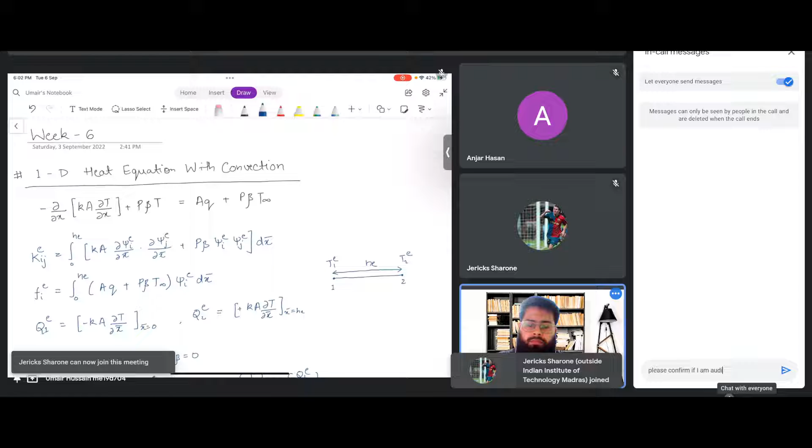May I know your feedback for the course so far? Hello, yeah, am I audible? Yeah, hello, good evening. So can you guys confirm if I'm audible?

Okay thanks, so yeah, it's already 6 weeks have passed for this course. I would like to hear your feedback if anyone wants to share how the course is going for them so far, and then maybe we'll start.

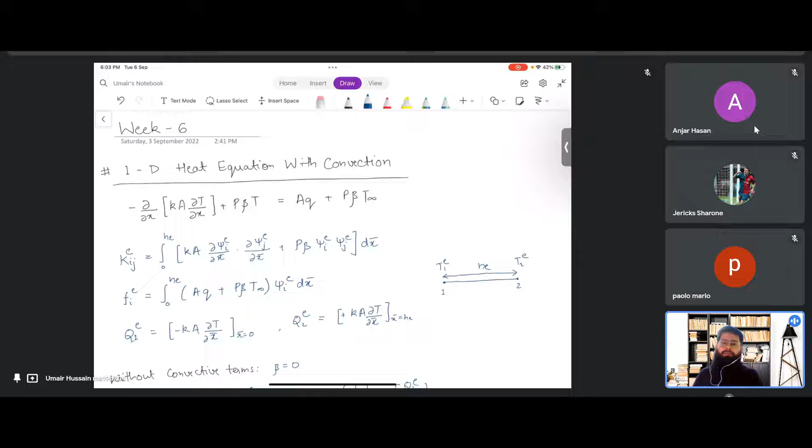We haven't done any introduction for the participants of this course so far. Is it possible for anyone to unmute themselves and give a quick introduction on why they are taking this course? So yeah, anyone would like to introduce themselves and give some feedback on the course so far? Already 6 weeks have passed. Would anyone like to volunteer?

Yeah, hello. So Mr. Paolo, how is your experience so far for this course? Yeah, it's really basic, yeah.

Mhm, yes. Even I have been following this course. So after a long time revisiting FEM, there are a lot of basics. Yeah, exactly, so it's basically focused on FEM. Although the course is under the mechanical faculty, so there's some kind of bias for solid problems and thermal problems, but yes, it's quite basic. I have also been following this course, it's been a long time since I have had touch with FEM. So yeah, there are a couple of basic things that even I had forgotten or not gone through. It's a learning experience for me as well for the basics, but for solving more realistic FEM problems, there's a long way to go from here.

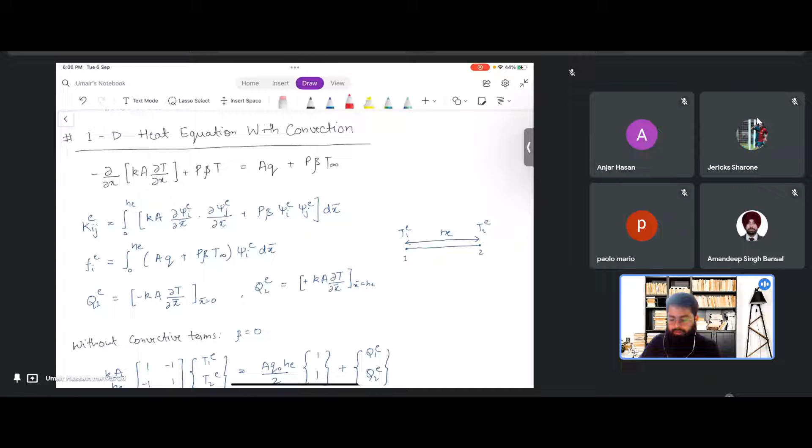Until last week, we had just started off with the introduction to heat conduction problems, heat conduction with convection. This course is basically focused on 1D, so we consider the 1D heat equation with convection. We know the governing equation for the 1D heat equation with convection, and then we can get the weak form as we have been doing so far. We get the stiffness matrix term, the force vector terms, and the boundary terms as well. Ignoring the convective term, to remove the convective term we just need to remove the beta term, giving the simple conduction problem.

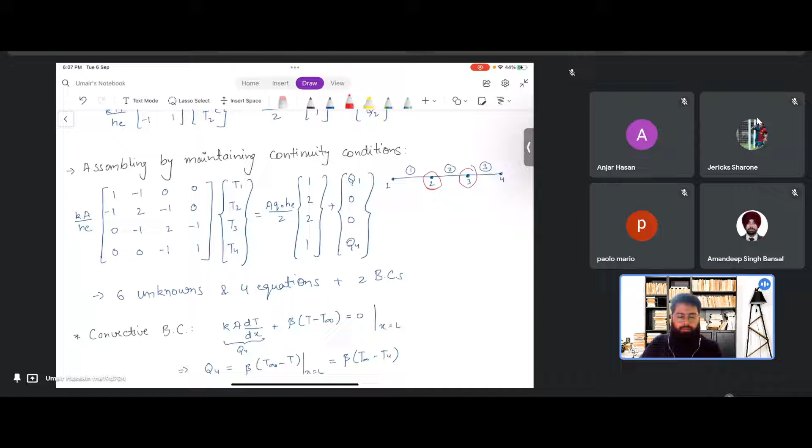The assembly is just as usual, what we have been doing so far. Whatever the common node is for two elements, we follow the continuity condition for the primary variable and add the force terms at the common node. For extra unknowns, we use the boundary conditions, and that's the way we solve any basic FEM problem.

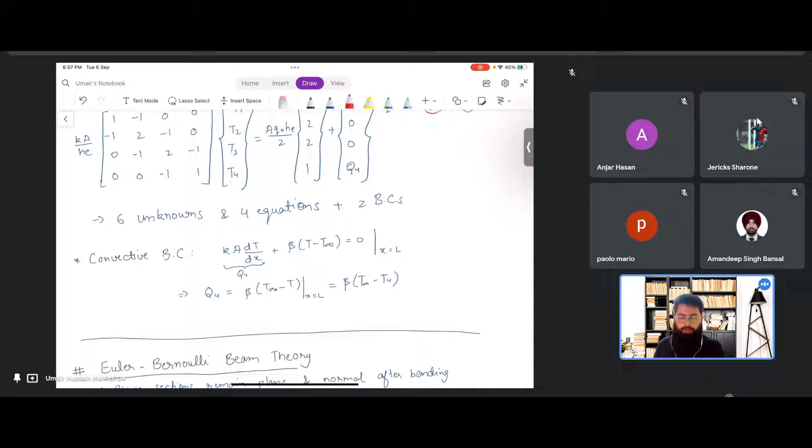So we just visited the basic 1D heat conduction problem, and then we started with the Euler-Bernoulli beam theory. As you might have studied in solid mechanics, there are some basic assumptions for Euler-Bernoulli beam theory. The very fundamental one is that plane sections remain plane and normal after bending. This kind of assumption is more suitable for long beams having considerably less thickness, and also where the deformed angles are small.

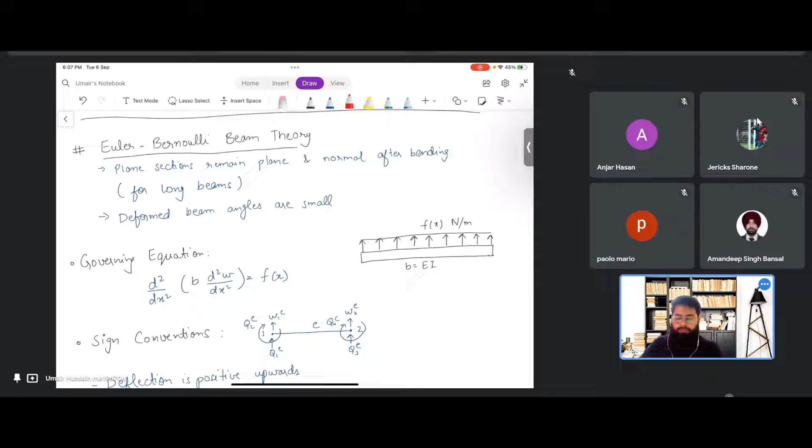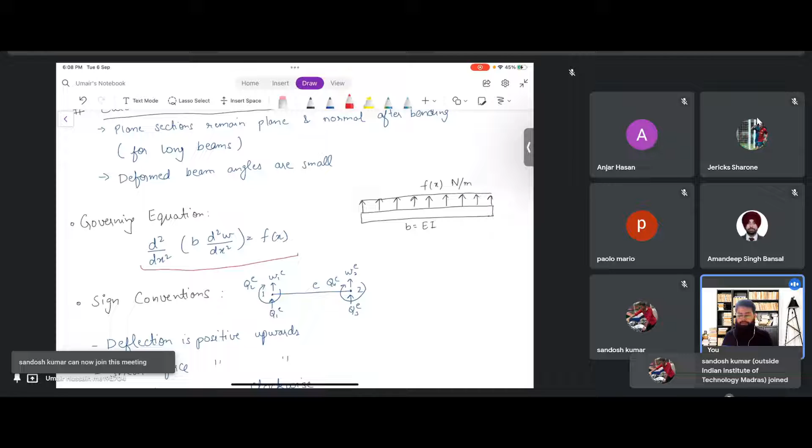For Euler-Bernoulli beam theory, we get the governing equation for deformation like this. We'll be following certain sign conventions for these problems: as usual, the upward direction is taken as positive for deflection and shear force, and for moment and slope, clockwise is taken as positive. So this is the general sign convention we'll be following.

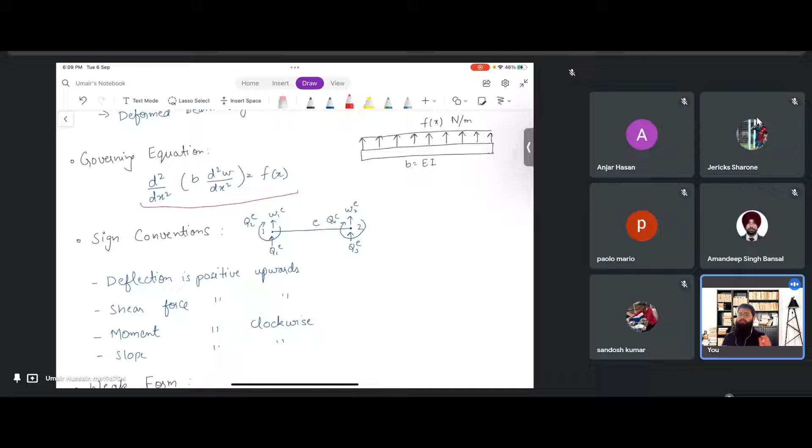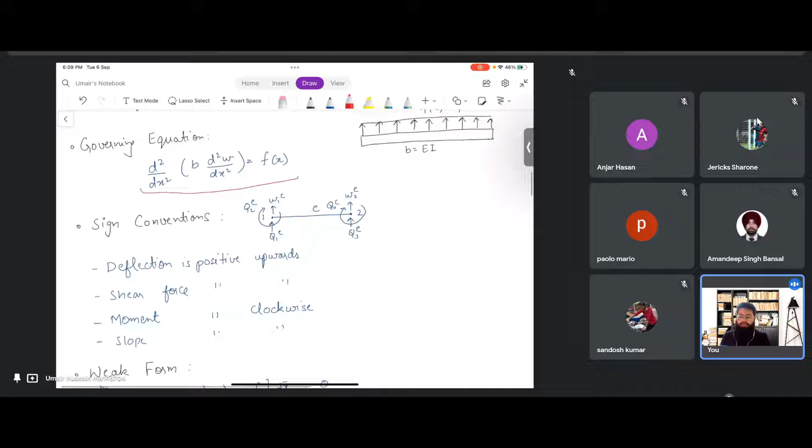Now this type of equation is a fourth order equation, so that's the unusual thing about this problem, that's why we are studying it separately. The heat conduction and axial deformation bar problem were totally identical - same equation, same type of boundary condition, everything was the same. But in beam problems, the equation is now a fourth order equation, so we have considerable differences here.

Now the integration by parts is done two times, and we get two separate terms for this boundary term, so our degrees of freedom per node increases. Since we have two primary variables now, one is W, that is deflection, and the other is the slope, which is the derivative of W.

For secondary variables, there was something we studied in earlier classes to identify the primary and secondary variable using the boundary term. So if we substitute in the boundary term, we have the weight function and the coefficient of the weight function. If we substitute the primary variable with the weight function, whatever we get is the primary variable, meaning the one we are solving in the equation. If we substitute it here, whatever we get is the primary variable, and whatever coefficient is left, that is the corresponding secondary variable. So here also, if we substitute W, we'll get W dash, which is another primary variable, and the corresponding coefficient is the secondary variable.

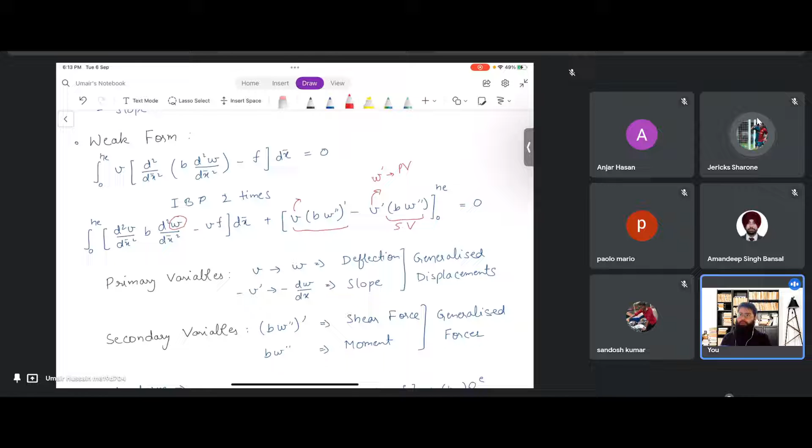I hope there's no other question. Should I move ahead? Yeah, yeah, okay. Thanks, thank you. Yeah, no problem.

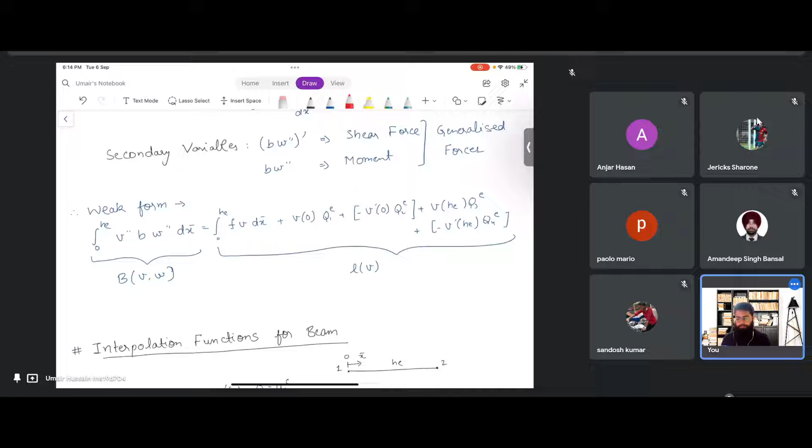So now in the beam problem we have two primary variables and two secondary variables. The interpolation is going to be more complicated and a little different. We get the weak form, the bilinear term, linear term, everything, and the next thing is to find out the interpolation functions.

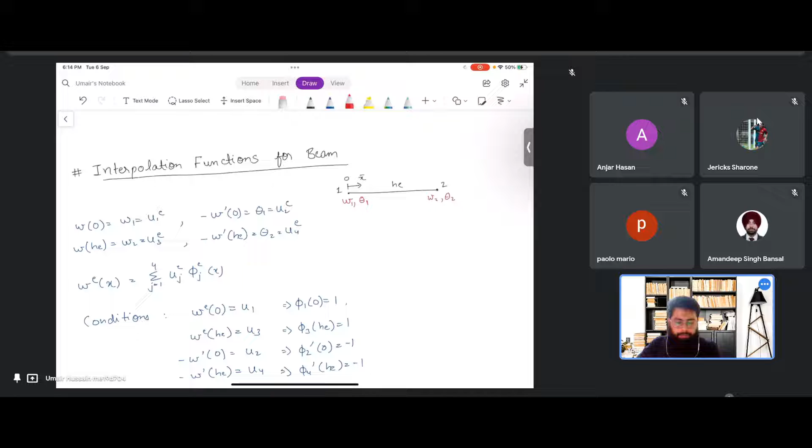So there are two things. On the first node we have the deflection W, and we also have the slope theta. On another node we have deflection and slope. Our interpolation should be such that we get the required values for W. Our W element should be such that at the respective node we get the required value of W, whatever it is, plus we should get the required slope of W.

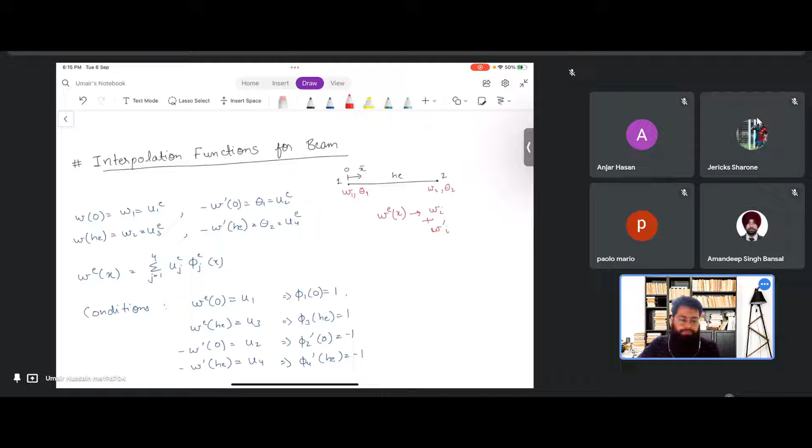So basically what we do is take a common variable, U1, U2, U3, U4, and when we put these conditions, at the first node this should be U1, and on the first node this should be the deflection, this should be slope, at the second node this should be deflection, this should be slope. So we'll get a couple of conditions.

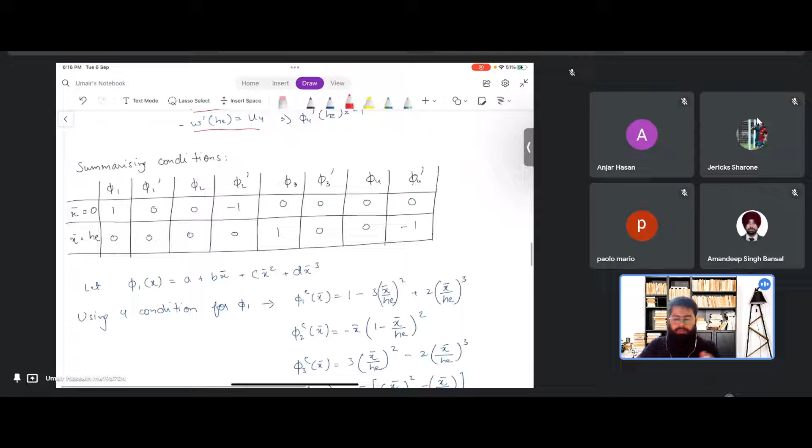There's a lot of equation involved here, but we can just go through it. For each phi, we have four conditions: two conditions on the value of phi, and two on its derivative. So with four conditions, we can get a third degree polynomial.

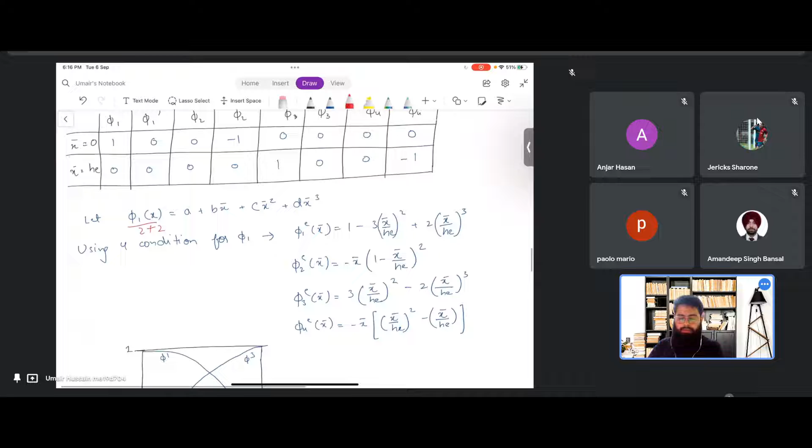Since we have four equations, we can get the value of four variables, so we can get a 3-degree polynomial. Solving all this, we get complicated polynomials, and we can even plot them to see that we'll get the required value of slope and the value at the corresponding node.

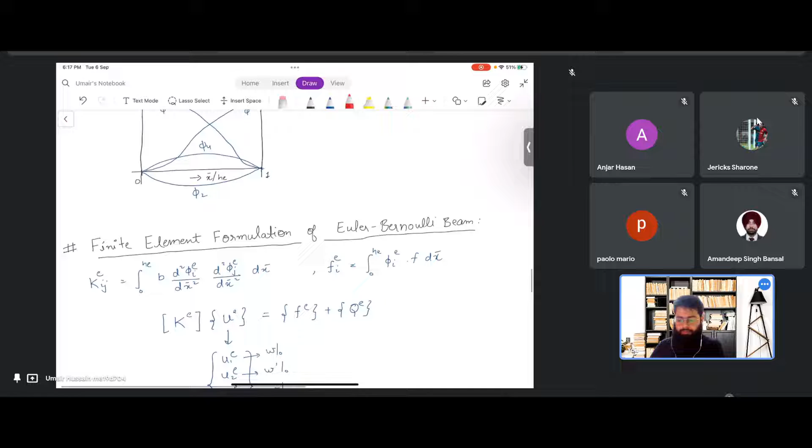Okay, so doing the finite element formulation for the Euler-Bernoulli beam, we have the stiffness matrix term and the force vector term.

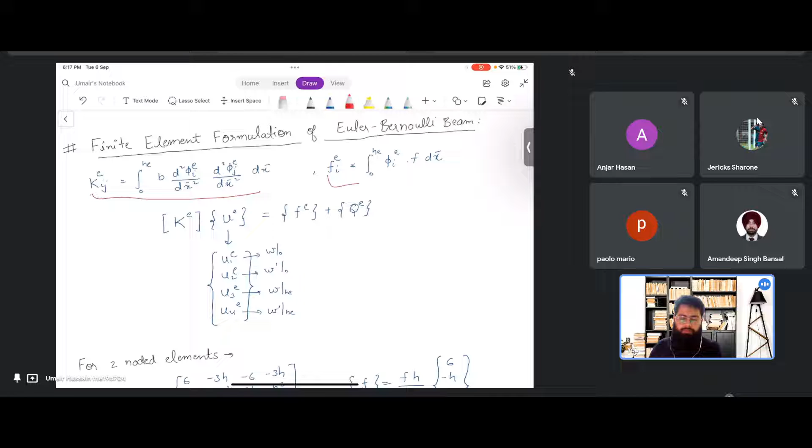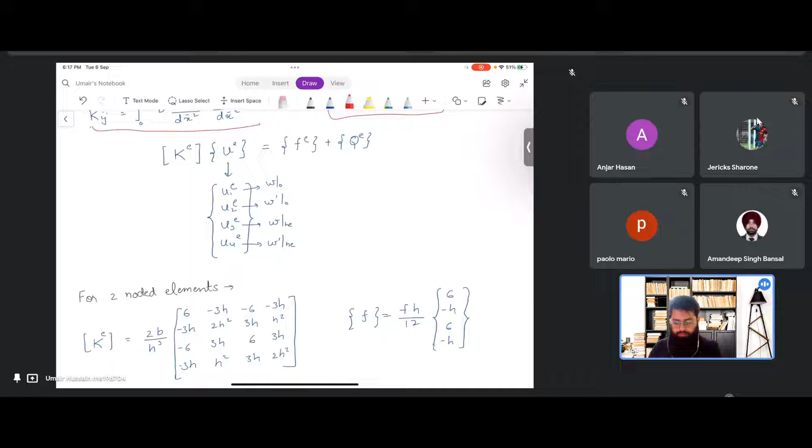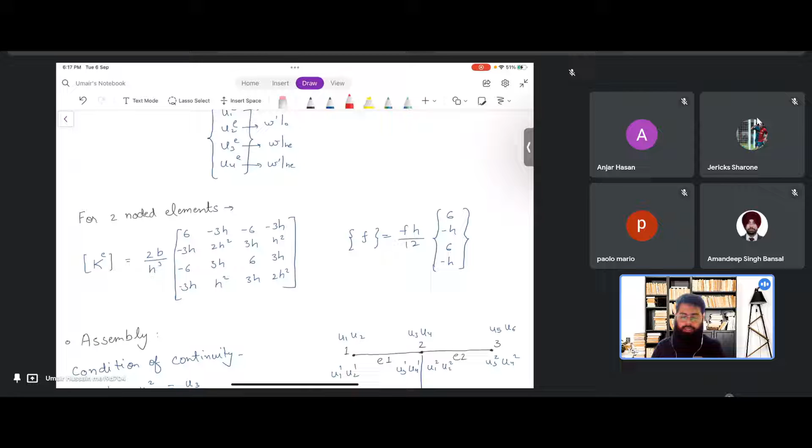Now it's pretty much the same, but we need to watch out for the continuity condition. The process of solving this and getting this is rather difficult. Maybe I'll try to show you in class at the end how we got all this, but it will take time.

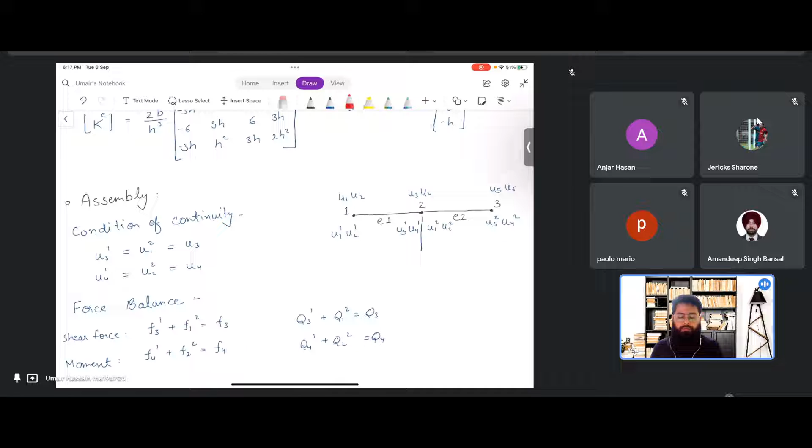So the main thing is the assembly part of this, for two nodes being shared. For a node being shared by two elements, we'll have a common displacement term and common slope term.

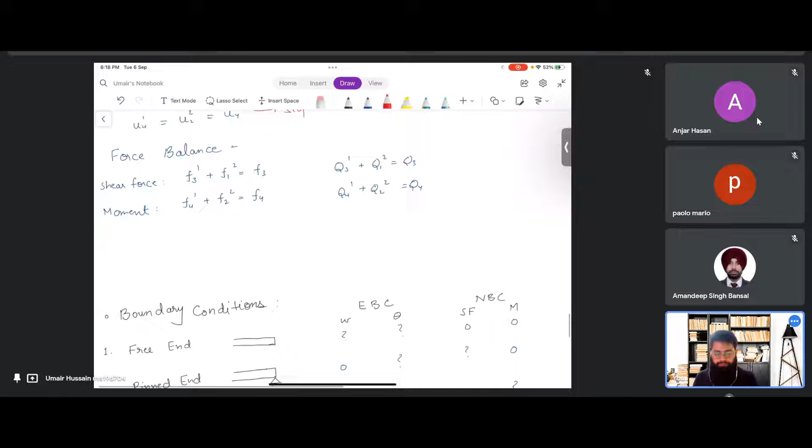This is the displacement, this is the slope, and likewise for shear force and moment term. That's how we assemble this. I'll show you a bit of it later; first we'll just go through it briefly.

One thing also unique about these problems is getting the boundary conditions. For a second order equation we need two boundary conditions, and for a fourth order equation we need four. Earlier we had one primary variable and one secondary variable, one for each. Now we have two primary variables and two secondary variables, one for each, making four boundary conditions.

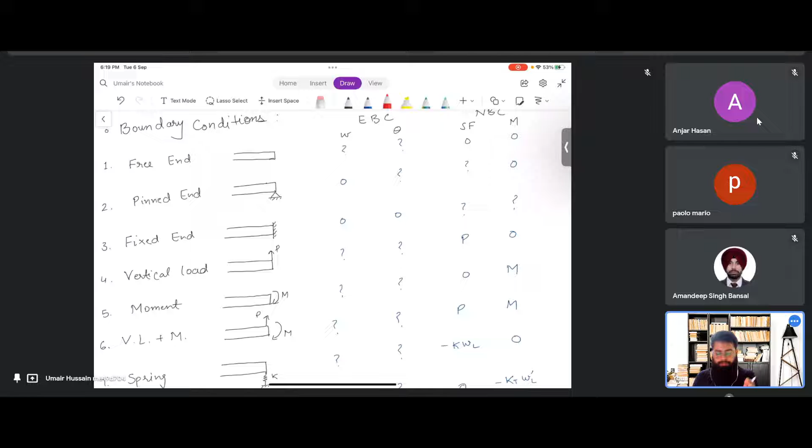So these are summarized here. I think you might have gone through this in class already, so I need not elaborate; this is very trivial. If there's any doubt, please let me know. I think we are pretty much done here, and then we'll start the questions.

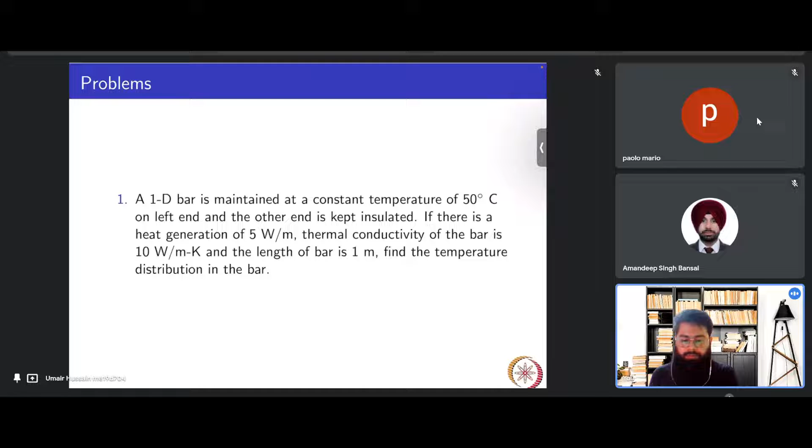So I think if there's no doubt, we'll start with this problem. As usual, I request your participation. So we have a 1D bar here.

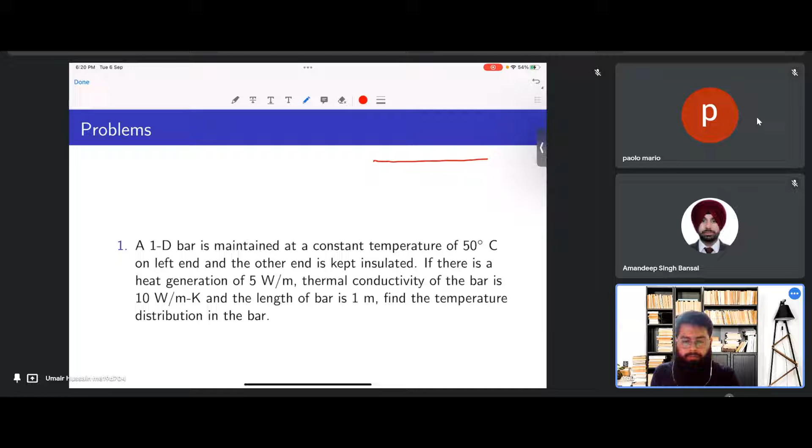Temperature at this point is 50 degrees, and the other end is insulated. So can you tell me the boundary conditions? I've written it for the first node, so can anyone tell me what should be the boundary condition for the other end of the bar?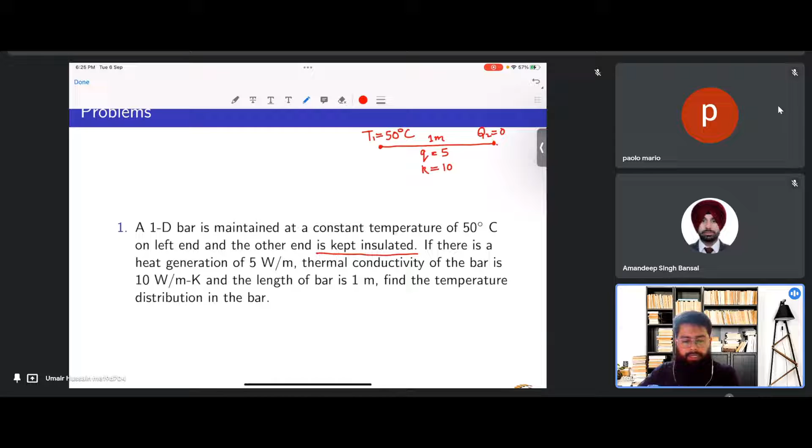So this is a general 1D heat conduction problem. We'll keep it simple and consider one element, two-noded, one element. So the heat conduction equation.

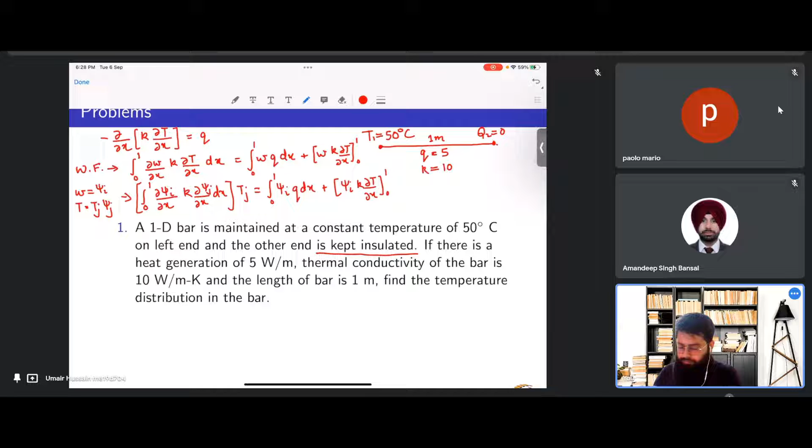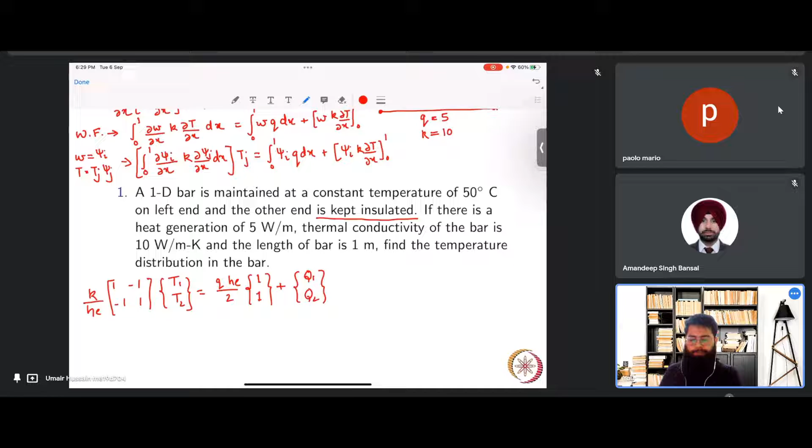So instead of solving it, we have the direct form for the matrix: k by h times the matrix 1, minus 1, minus 1, 1, multiplied by the temperature vector equals q*h/2 times 1, 1, plus q1 and q2. So what do we know here?

So here we know q2, that is 0, and we know t1 here, that is 50, and we know k here, k is 10. So h is 1, we're taking one element, and the length of bar is 1. We'll take h as 1, and all units are SI, so we don't need to worry about units. We have 10 by 1, so we'll get 10 minus 10 minus 10 T2.

We have q as 5, I guess. Yeah, again h is 1, so 5 by 2, we get 5 by 2, 5 by 2. Then we have q1 unknown and q2 is 0.

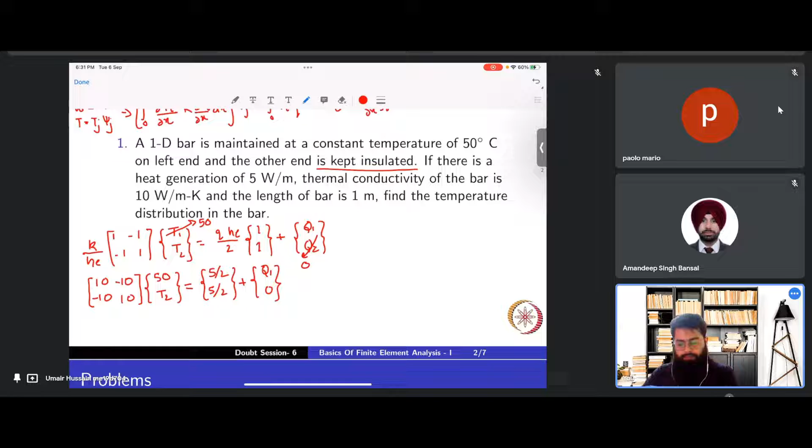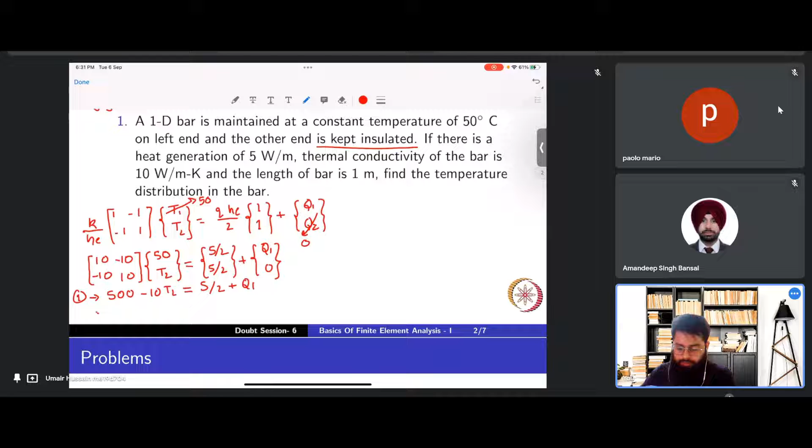So we just solve the equation. We can take the second one first. First equation is 500 minus 10 T2 equals to 5 by 2 plus Q1. Second equation is minus 500, and then we have plus 10 T2 equals again 5 by 2, 0. So we have two equations, two unknowns.

That's simple to solve. We get T2 as 500 minus 2.5 divided by 10 is 2.5. So we get, 497.5 divided by 10. So T2 is 49.75 degrees Celsius. And we can also get Q1, but that's not what's asked in question.

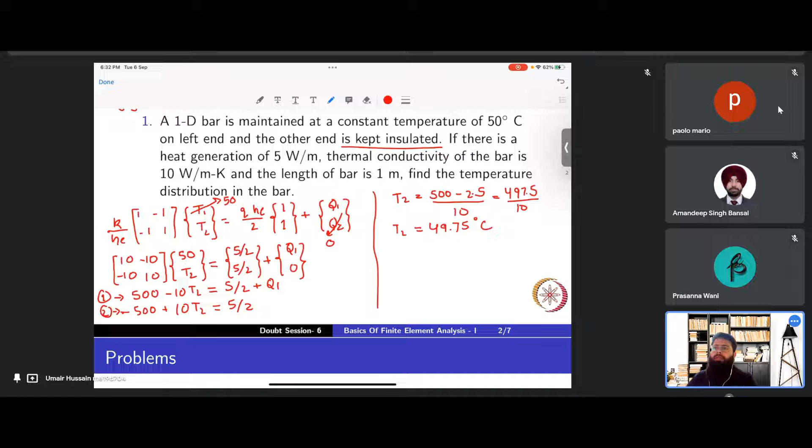What is asked in question is the distribution of the bar. I again would like your suggestion here. What should be the function for t here? Tx is a function of x. Would anyone like to volunteer to answer this?

Do we have anyone who would like to answer? So we have a new joining just now, Mr. Prasanna. Did you get what we are doing here? So can you hear me, right? So Mr. Prasanna, are you there? Or am I audible?

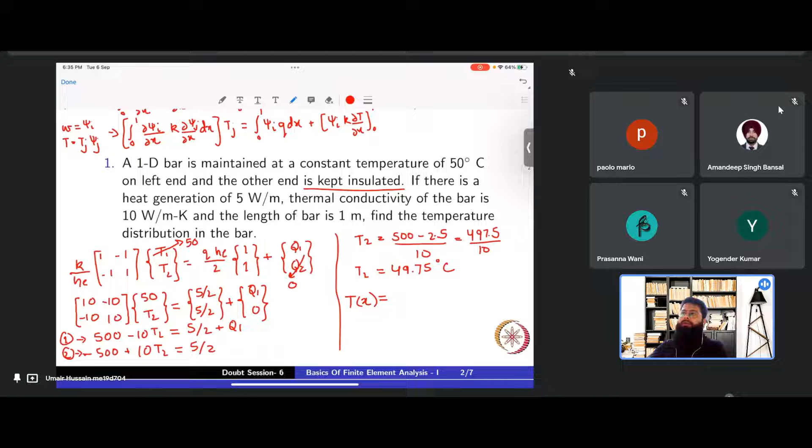Are you guys with me? Can anyone confirm? Okay, if no one is answering, then I'll have to proceed. If you guys can get some input here, then it will be an interesting interaction, and otherwise it becomes very monotonous. I keep on speaking. It's basically a doubt session. So in a doubt session there should be interaction. You guys should ask something or give some interference at least. Anyway, otherwise I'll go ahead.

So when we decide the interpolation function, we assume t here, right? T should be equal to summation of tj times psi j. So the value at each node should be multiplied by the corresponding shape function, and like that t2. So what is psi 1? Psi 1 is, I think, xb minus x over h, right?

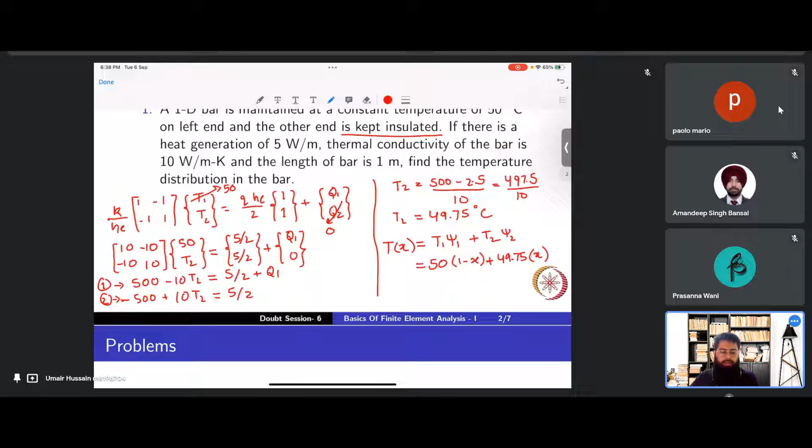So what is xb? It's 1. So it becomes 1 minus x, since h is already 1. And psi 2 becomes x minus xa upon h. So we get xa is 0, so we get just x, I guess. So we know the value t1, it is 50 times 1 minus x. And the value t2, 49.75... multiplied by the corresponding shape function. This way we can get a function for the entire domain.

And of course it's a linear function since we assumed it to be linear. So that's how you can get the value at any point. So if you want t at x equals 0.5, just substitute: t equals 50 times 0.5 plus 49.75 times 0.5. You just get the average of the two.

Since it's linear, the function would look something like this. So this is the bar, node 1, 2. So this is the solution. This is 50, this is 49.75. And at half, you'll get the average of these two values. So this is a simple way of getting a solution. Not a simple way, but I mean I demonstrated the whole solution technique using a simple problem.

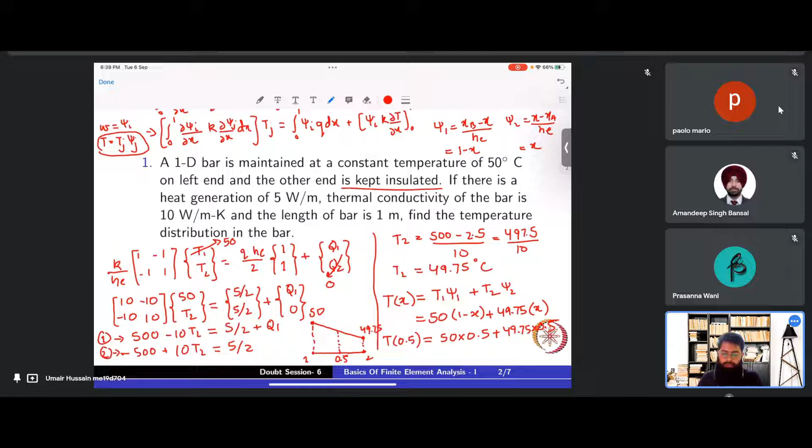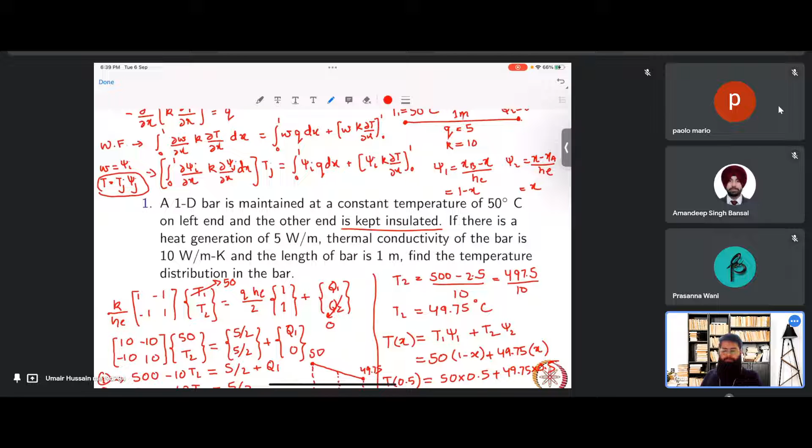Very simple, we just took one element, very simple terms involved, no conjugate functions. So that's how basically you go ahead with the whole FEM formulation to solve any problem. So I hope this was clear here. If there's any doubt, you guys are welcome to stop me anytime.

So the second problem here is we have to find the boundary condition for the given beams. So in the first part, at the left side we have a simple support.

Okay, fine, fine. So am I audible, right? I'm not speaking to myself. Okay, just wanted to confirm.

Okay, so Mr. Paolo, if you're already here, then I would like to hear some direction from you. Would you mind helping me out in these problems? Are we solving exercise? And you're of course very much welcome to interfere and ask doubts regarding this or regarding anything in the class that has been covered so far. Anything relevant, of course.

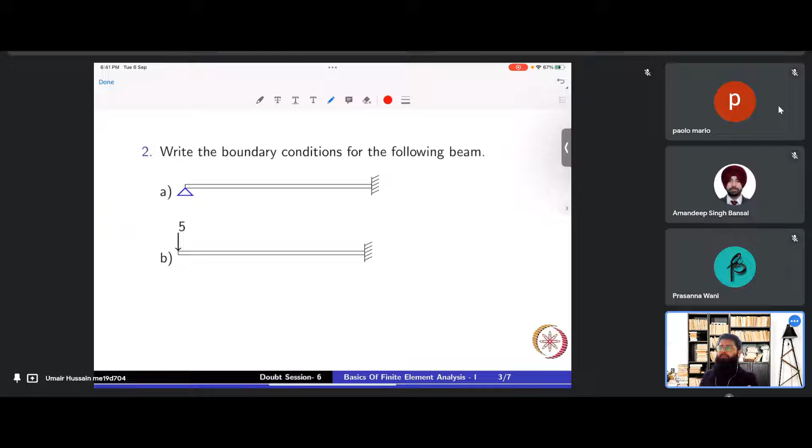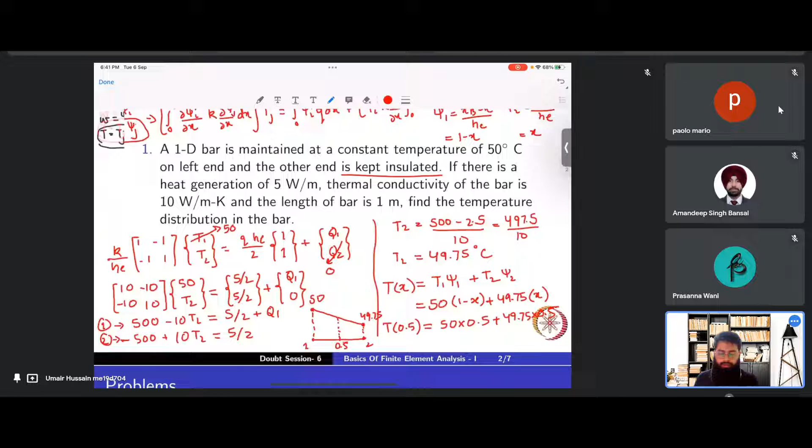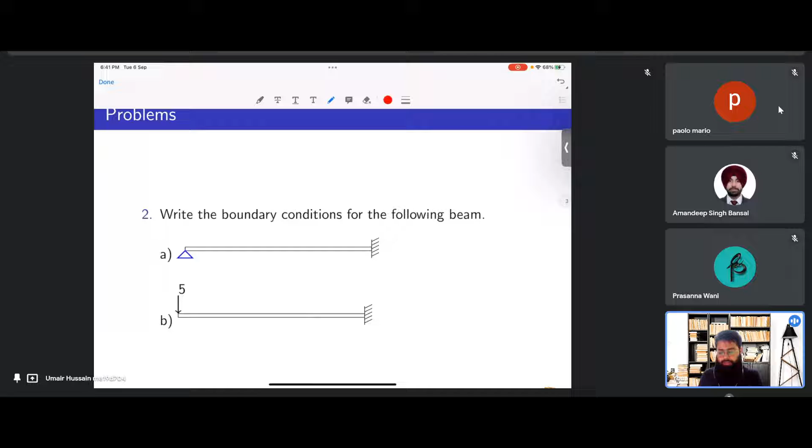So anyways, we just did one question here. We solved a simple 1D problem by considering one element for the entire domain, and we got some solution. And now we are doing this problem where we have to identify boundary conditions for a given beam. So in the first part, we are giving a simple support at the left end and a fixed support at the right end.

So at the left end, what should be the boundary conditions?

So we have four things, right? We have W, we have theta, we have shear force, and bending. So what can we say about each of these? Do we know any of these things? Would anyone like to answer this?

Okay, how does it affect the matrices? I think if you have done the past classes, it's just the same as before. After applying boundary conditions, you get the value for the unknown.

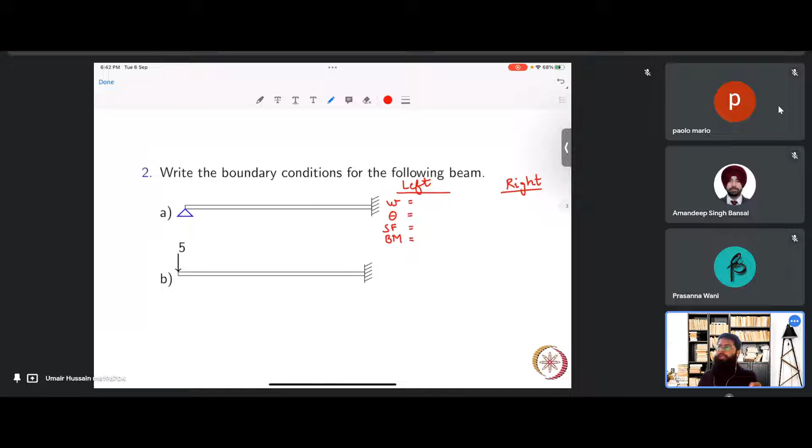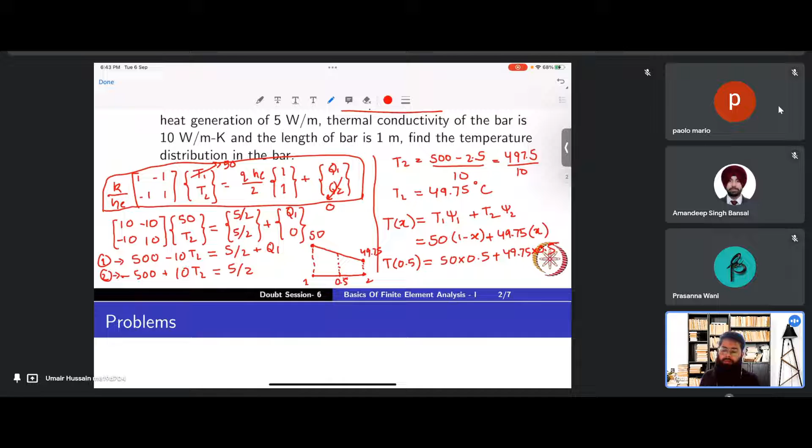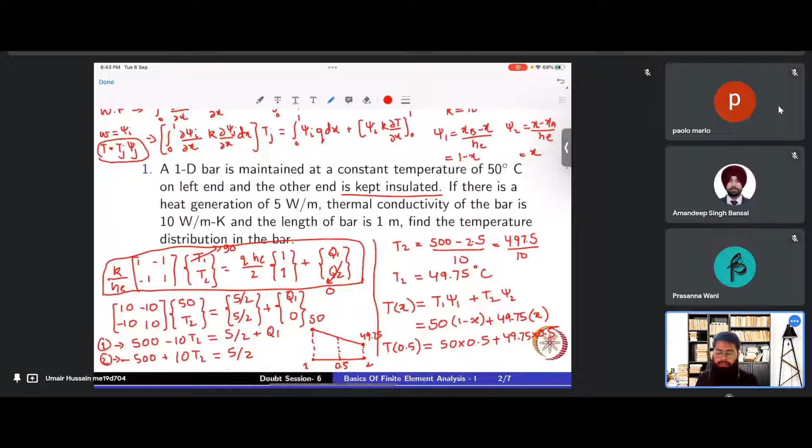So if I take the last question that we did here, we have this kind of formulation. We had four unknowns here: T1, T2, Q1, Q2, and as you can see, there are only two equations but four unknowns. So the other two unknowns are taken from the boundary condition. In the given problem we knew the temperature at one node and we knew the flux condition at the other node. It's insulated, so we just straight away substituted these values and got a simplified equation.

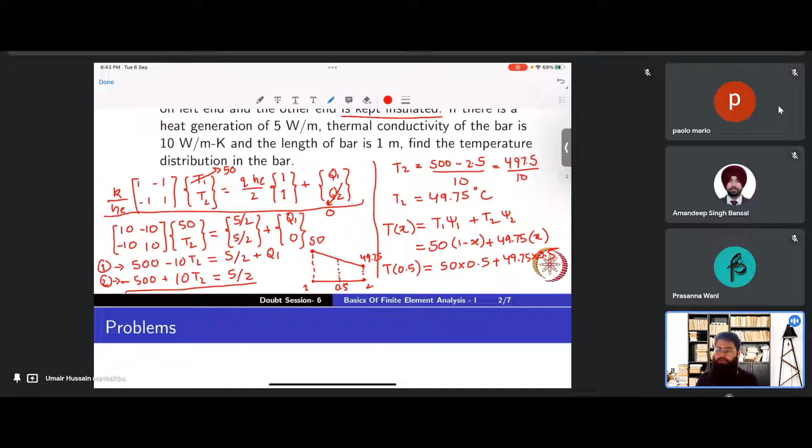So we got this kind of equation here, and we are just left with two variables. We can simply solve these equations. That's how we apply boundary conditions.

In terms of directly working with matrices and vectors, are you aware about applying boundary conditions in case of a simple 1D bar problem or heat conduction problem? Are you aware about that?

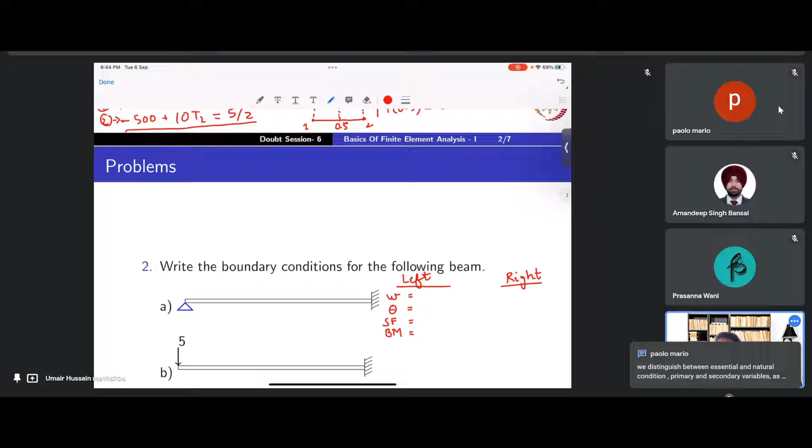We distinguish between essential and natural conditions, primary and secondary variables, as the first thing. I didn't get it very well. We distinguish between essential and natural condition, primary and secondary variables as first thing. Kind of, yeah sure.

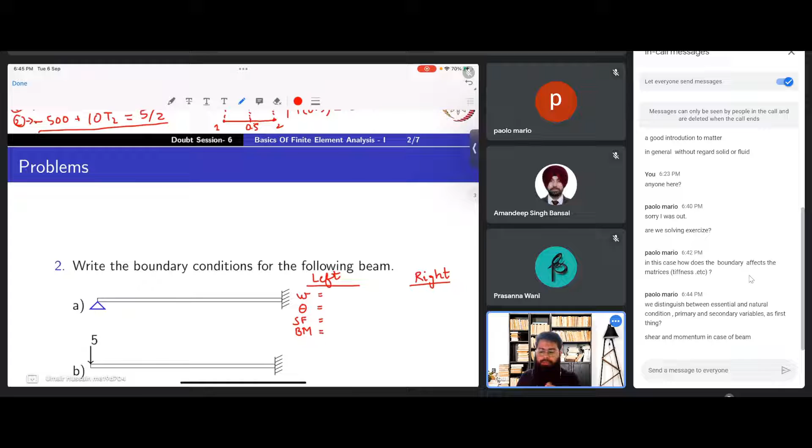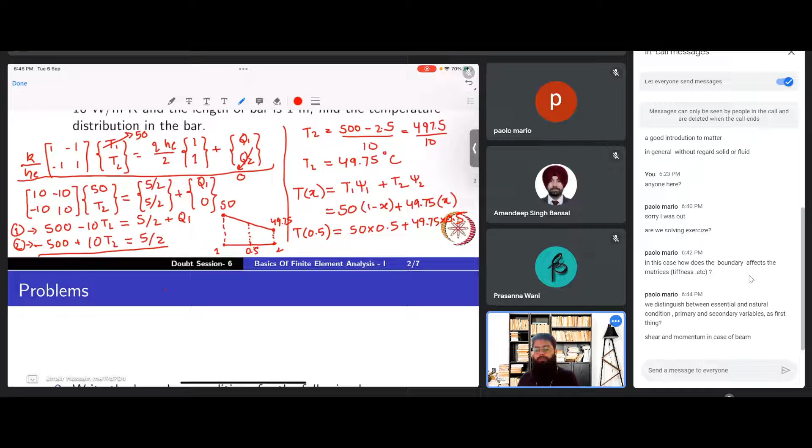So that's a separate thing. Apart from getting the equations in terms of these matrices and vectors, knowing the boundary condition is a parallel, separate thing. Both things come up together to give us equal known conditions as the number of variables, that's the thing. So just like this, we had two equations here but four variables. So we need to know the boundary conditions in order to solve this. It's not the first thing to do, but it's there, it's important to know. I hope that's fine.

So should we go ahead? Is there any more doubt, or should I continue? Okay, then we will proceed.

So at the left end we have a simple pin support, and we know that this bar cannot move up and down at this point—this is not allowed here, so this is definitely going to be zero. But it can deflect here, so we can definitely have some slope, which we don't know. And of course, if there's a pin support, we'll surely get a reaction, so we don't know the shear force. But a pin cannot generate a moment reaction, so that's surely going to be zero. These are the two things that we know here.

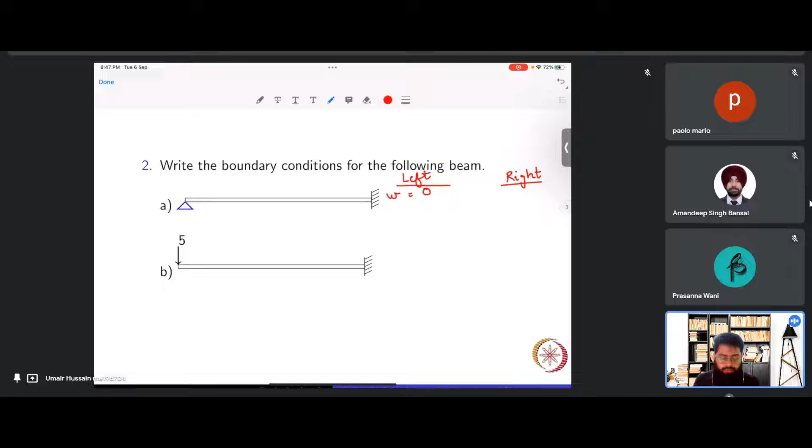So we just remove this and drag it together. So we know the bending moment, and it is going to be zero. On the right end, it can't move up and down, so displacement is zero, and it can't even tilt like this or like this—it's always going to bend a certain way, so the slope is always going to be zero. So these should be the four boundary conditions for this problem.

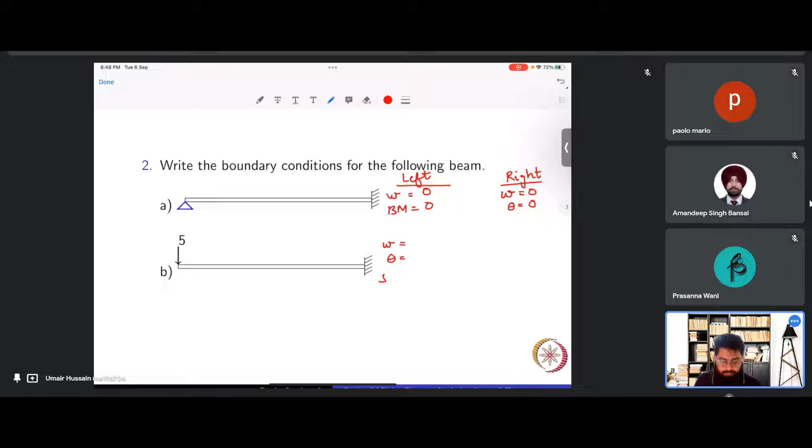Okay, and for the next problem, on the left hand we have theta. Anyone would like to guess what all do we know on the left hand here, for the second part, B part?

Theta unknown and shear force known. Okay, theta is unknown, right? Shear force is known, right? What should be the value of shear force?

Can we tell the value of shear force from here? Force applied, right? Can you give me the sign and magnitude of the force applied? Particularly, I want to know the sign. Of course, we don't know W also by equilibrium condition—no, we don't need to go so far. Whatever the thing is applied here, that is the boundary condition. We have the magnitude as 5, but what should be the direction? Excuse me.

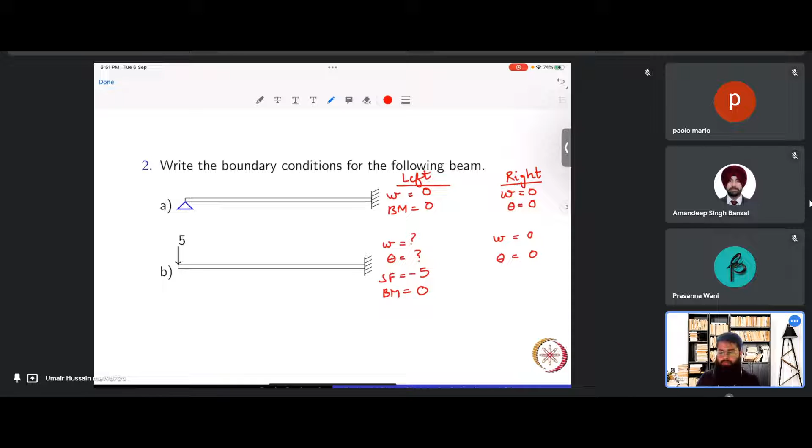Say that. And what do we have on the right side? Okay, right hand side is again the same. So without any ado, we just write this. Okay, I think this is fine.

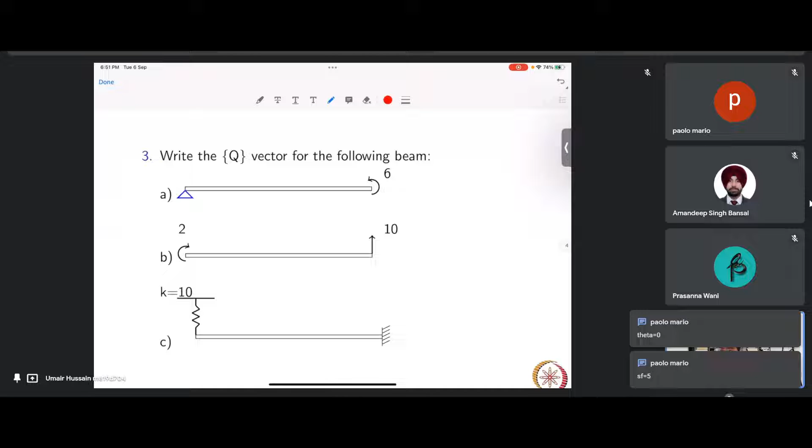Check right side, bending moment and shear force both are unknown. You just know the displacement and the slope. That is surely going to be zero for a fixed end. Shear force on the left side, it's not 5, it's -5 actually. On the right side? Yeah, yeah, we can know that using equilibrium condition, but we won't do that here because in FEM we just follow the equation and get the answer by the FEM procedure, not by applying the equilibrium equation.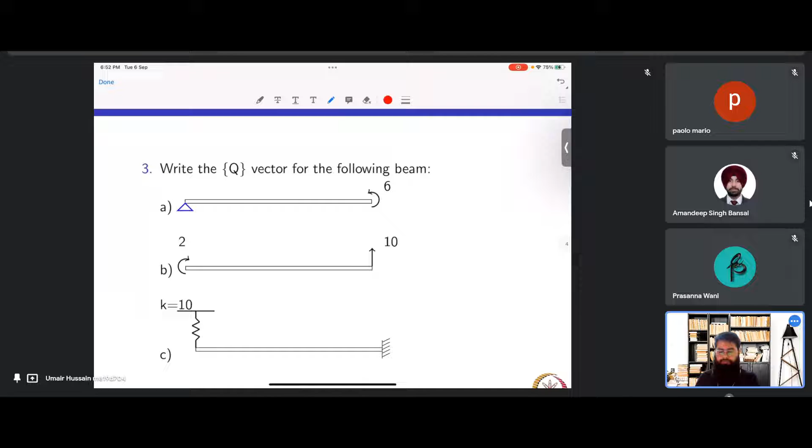Okay, so how do we write the Q vector? Q vector has four terms. So first one is the shear force at point 1, then the bending moment at point 1, third one is shear force at point 2, fourth one is bending moment at point 2. So for the first part, do we know the shear force and bending moment at the two ends?

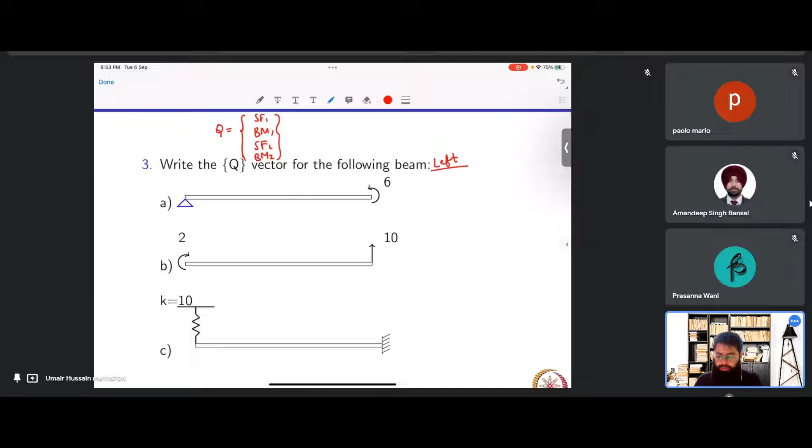Okay, at the left hand, so in order to write the Q vector, we just need to know the shear force and bending moment. So we don't know the shear force, so we can keep it as an unknown, Q1. And the bending moment is going to be 0, so we can just write 0.

And on the right side, yes, right, these are only applied. They can be so, here at the left end, since shear force is not known, we'll just write it as Q1. But we know the value here, the vertical displacement, W. So in the corresponding equation, when we substitute the value of W and everything, from there we can get this value of reaction here, Q1. So initially we just go with whatever we know, and the unknown things are the reactions only. We keep them as unknown, as a variable in the equation, and solve them to get these reactions.

So on the right side we have shear force is 0, nothing is applied. And what is the value of bending moment on the right side? Plus 6. The direction is anti-clockwise. So I think what we took the convention was clockwise to be positive. Is it? Yeah, it's anti-clockwise. So I think we'll take -6 here. So the Q we'll get here for part A is Q1, 0, 0, minus 6.

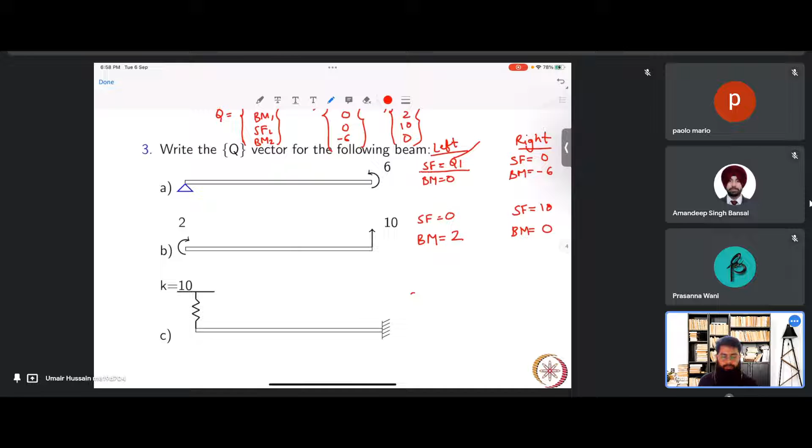So third part, what would be the shear force here? Bending moment, nothing is there, it's 0. What would be the shear force?

KW, right? But with a negative sign, because the force upward would come only when the deflection is downwards, minus W. So we have K as 10, so we'll have 10 times W, or we can call this U1.

On the right side, we don't know shear force. Q3, we don't know bending moment, Q4. So what should be the Q for this part? 10, sorry, minus 10. 0. Q3 and Q4 are unknowns, and the corresponding U would be...

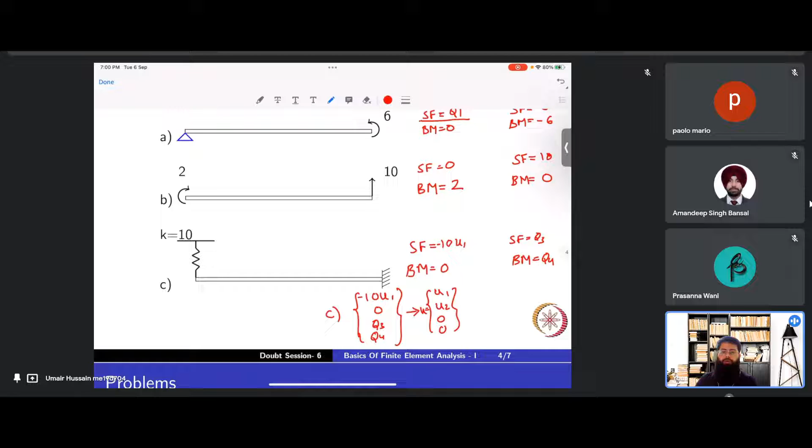Okay, I hope this much is clear.

Yeah, right, exactly. That's the whole point of boundary conditions actually. You need to fix certain things at the boundaries to get a system of equations which have a definite solution. Otherwise, it would be indefinite number of solutions when we have more variables in the equations. We'd have infinitely many solutions.

I don't remember what's the term for that system of equations. Okay.

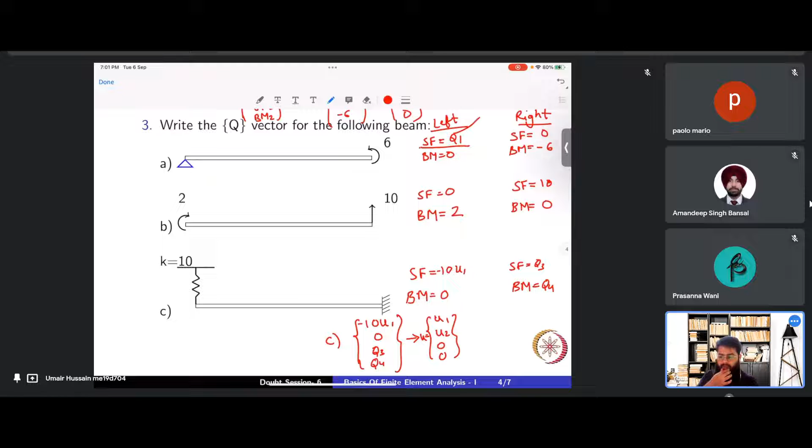So I hope this much was clear. Do you have any doubts here, or should we stop now, or do you want some more problems to be solved? Please let me know.

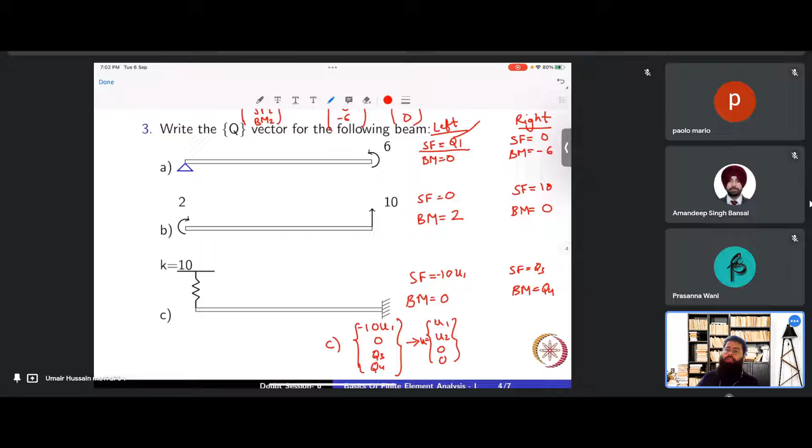The Timoshenko beam is different in its assumptions. That type of beam's assumptions involve a relatively thicker beam compared to Euler-Bernoulli beams. So we have considerable shear deformation across the cross section. I'm not sure, I haven't gone through Timoshenko beam in detail, but I know it's for relatively thicker beams.

Okay, this was clear. Yeah. Is there any other doubt? Please feel free to ask.

I wanted to solve some beam problem also, just like I solved the 1D heat equation problem, but that would take a lot of time. The equations are like a 4 by 4 matrix, and the shape functions are very complicated. It would take a lot of time to solve these things. If you want, I can do it maybe next class.

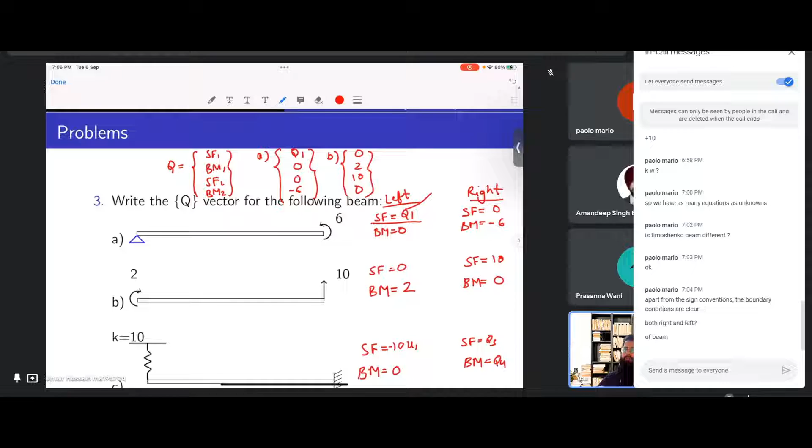Okay, it's fine. Please let me know if there's any more doubts.